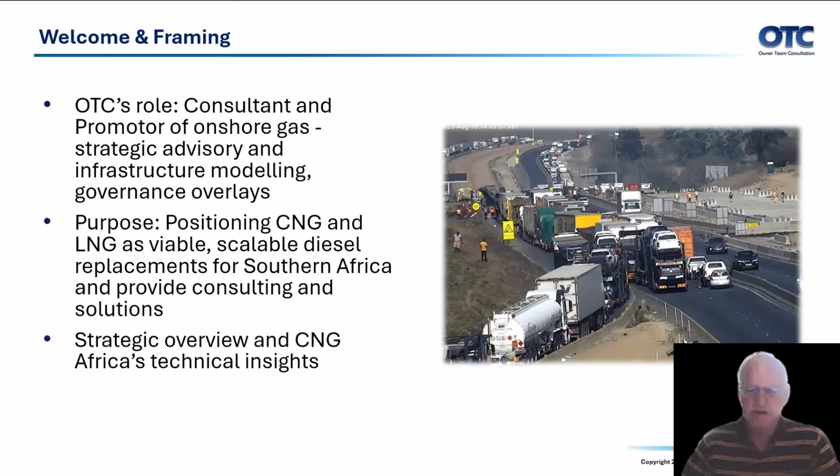South Africa, and I focus here on the South African numbers, but obviously it expands into the total of Southern Africa, consumed 12.5 billion litres in 2024, basically transport, mining, agriculture and backup power.

Maintenance heavy engines and declining resale reduce the fleet return of investment. In South Africa, it's actually very tough to make a profit out of your transporters because of the low margins.

Then it also contributes to pollution. 60% of the diesel is basically liquid fuel mix, and it's increasing. Around 80% of that is imported. You can just imagine what's the impact on the foreign outflows.

And then there's serious issues of volatility, theft, emission risk that makes it very difficult for your consumers of this in your transport, logistic heavy economy. And then your ESG and fuel security pressure demands strategic alternatives also.

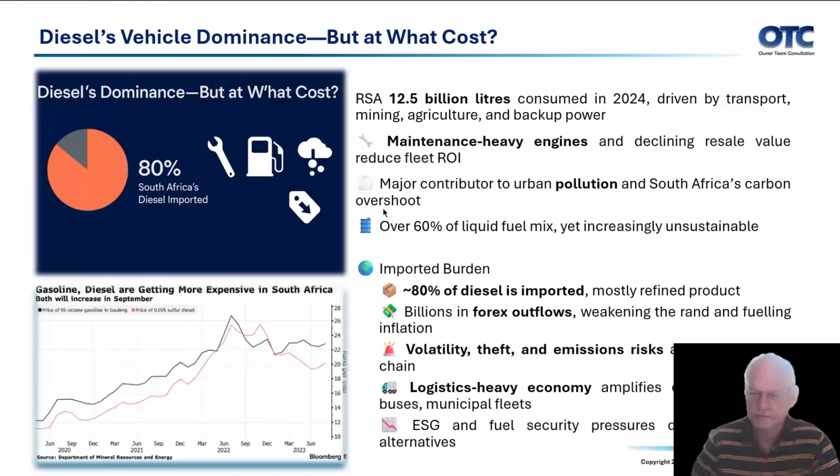What's happening in the global arena versus in South Africa, and there's a definite lag. Global markets are accelerating EV and CNG and LNG adoption, and you see it across the world. South Africa lacks policies, incentives, infrastructure and fleet transition planning.

It all starts with policies, and if we can put the policies in place followed by incentives, that could add a lot. Where we do see traction is in the urban centers that are starting to favor natural gas and electrical taxis and buses, and CNG Africa speakers will get to that, but we will start seeing more fuel stations for gas in these centers.

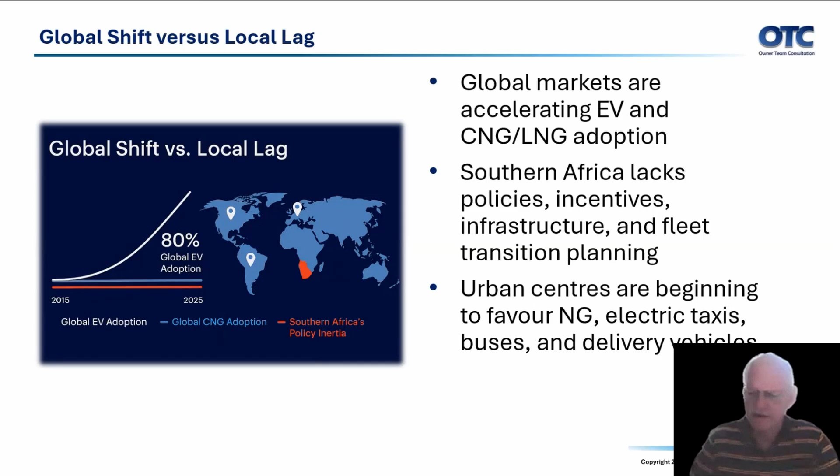What is the alternative? Well, it's basically diesel, and then CNG and LNG, and your EVs. If you look at the slide, you basically see that CNG and LNG is the hotspot or the sweet spot for South Africa. It offers a more balanced, scalable transition for long-distance heavy-duty vehicles, bridging the gap between global ESG pressure and local infrastructure. And it's very scalable.

EV is obviously a long-term solution, and we'll work on that, but it will still take time, and it does have its shortcomings for us at this stage.

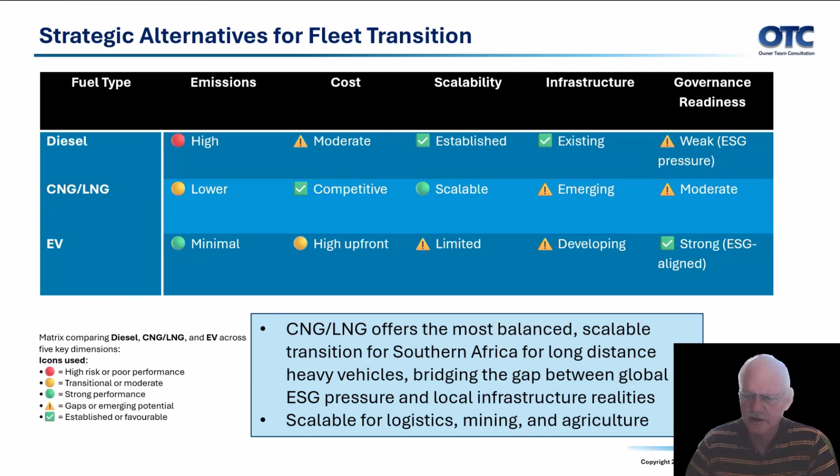The key enablers for onshore gas - and you see I'm focusing on onshore gas, and if you remember our April webinar, we talked a lot about the onshore gas - you can see in the picture on the right-hand side quite a lot of gas fields, and they are available and what's happening to them. But the first key is we're slow in unlocking these CBM or natural gas onshore resources.

But a lot of companies are busy working on that. It's Botala in the Serowe area and also Kalahari Energy. Then Kinetiko in the Amersfoort area, and then Botswana and Zimbabwe CBM and others.

What's important is to accelerate reserve certification and confidence so that you can get your funders to get involved in that. At this stage, these companies are basically startup companies, not having all the finances. So the development funding is key.

But then the modular infrastructure - on top of these areas, you can deploy small-scale LNG plants. And the PolaireTech International that you see a photo on the right-hand side is a very good example of that. We had presentations on that already in this.

When start developing cryogenic corridors, the N3 and maybe the Platinum Belt, the N4 in South Africa, are very good examples. And start converting or putting in place LNG trucks or dual fuel trucks and the refueling backbone, and then get your own OEM support.

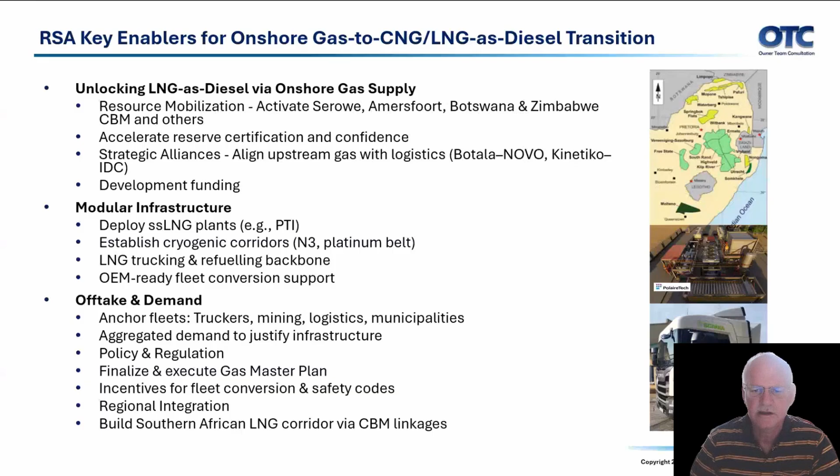You've seen this slide, but I'm just refreshing it. What's important is that the gas is available onshore, and you can see the TCF numbers are quite high, which can support development of CNG and LNG. It's also very well positioned, right on the N3 corridor, in the Botswana area where there are mines and power stations, and in Zimbabwe. So you don't need to move gas too far to convert it to LNG or CNG and start using it.

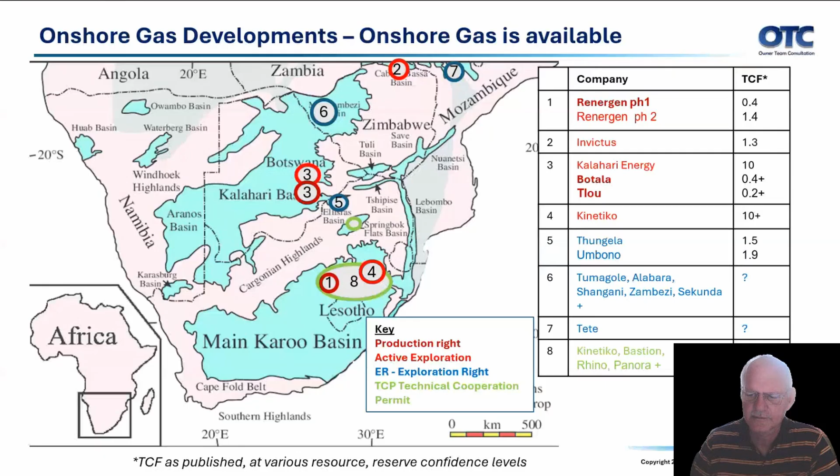Now, what development is happening on these fields? Botala, at this stage, has upgraded their resource already to 454 BCF. Their exploration continues, and they have signed MOUs with off-takers. Interestingly, after I wrote this, there was also a press announcement that MDCB, the government investment arm in Botswana, has also pledged to take up a 50% stake in this to continue the feasibility.

Kinetiko Energy is very active in continuing resource development by drilling more holes and certifying that, and it's attracting investment. Renergen is in the process of a merger with ASP Isotopes, and hopefully that will bring in more finance to really run and start the infrastructure ramp and do better. We all know that Renergen had a very difficult path. Invictus Energy is also busy forming a strategic alliance with Al Mansour Holdings, and they're progressing quite well with their gas expansion. So what we can see from this slide is that the gas is going to be there, it's going to be certified, and it will be ready for investors to put more money into this.

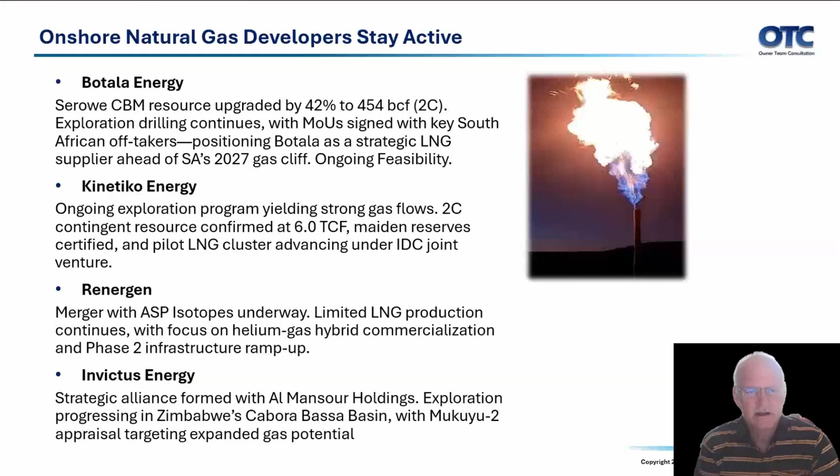What is OTC doing in this ecosystem? We're playing a strategic advisory role that can help with the development. So we assist our clients with development planning, strategic planning, detail work, stakeholder alignment, and looking at the whole business strategy and business model to make that work.

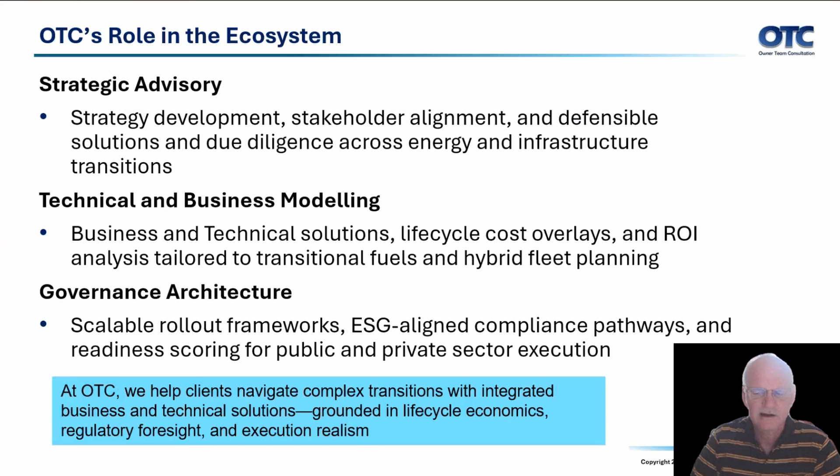We assist with technical and business modeling solutions, and then also scalable rollout frameworks. So we help clients navigate complex transitions with integrated business and technical solutions. This area specifically, because it's in the early phase of its development, that overall strategy look is very important.

Just a case study, and I call it XX Hauler - I didn't want to put the name up. They have a fleet of 33 trucks, running between Gauteng and Durban. If we use a 30% discount of diesel to LNG or CNG, that could be imported or locally developed, and all of that is possible if we looked at all the cost analysis of importing LNG or also producing LNG from onshore.

I think it's more important to look at the orange line in the table. What you can basically see, if I can get to a point of 100% LNG - obviously it's not a conversion of trucks, it's LNG trucks - they can save 14 million rand a year. But even if I just do 40% LNG, which would be a combination of truck conversions, dual fuel trucks, and also full LNG trucks, in all those cases, the return on investment is very, very fast, and they could make 31% to 59% return on investment. That's not bad at all.

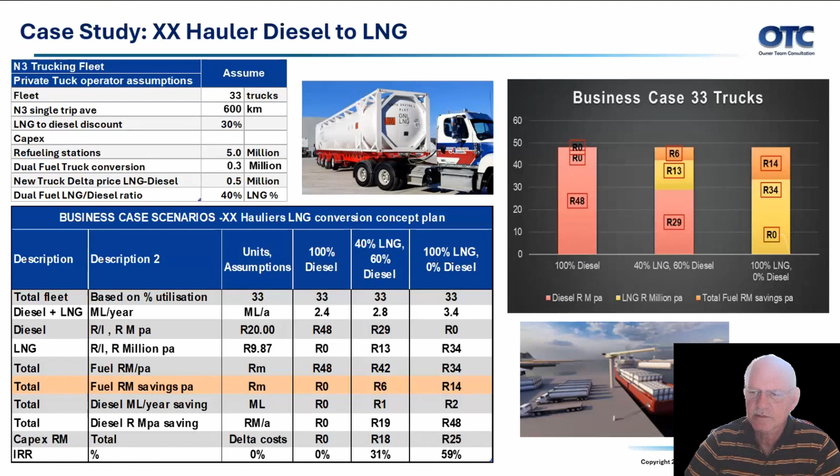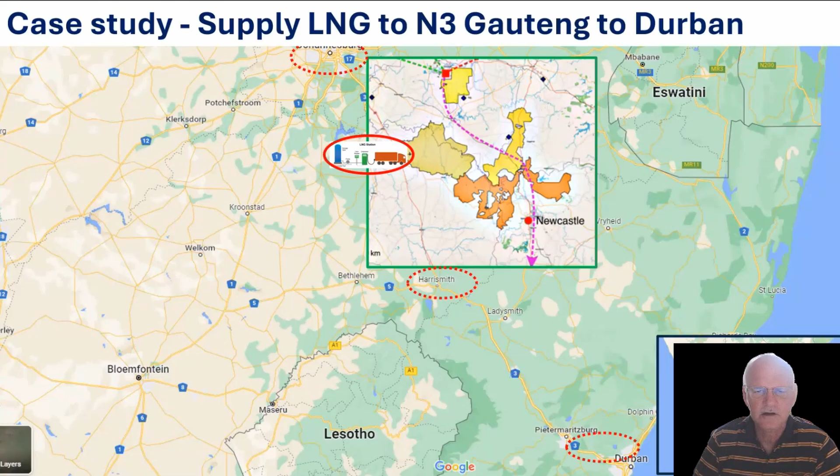So if you look at that business case, its location is on the N3 highway between Johannesburg and Durban. Initially, you put a 60 kiloton LNG terminal, maybe near Villiers. You put dual fuel stations on the route and also LNG fuel stations, and your initial target is 6% diesel, based on that 60%, and then you can grow the trajectory. Currently there are around 13,500 of these transport vehicles on that road per day in one direction.

And N3 is consuming 10% of the diesel of South Africa. The modeling used 22 Rand a litre for diesel with LNG saving of 30%.

Based on the PolaireTech LNG plants and feedstock from Kinetiko, from what we know of the Kinetiko concession, the impact is between 1 and 8 billion per year saving on diesel imports, depending on the scale. At 6% LNG, you already have 1 billion, and if you run up to a 75% replacement, you can have an 8 billion rand total saving.

But what's also more important, you actually reduce the diesel imports. The diesel imports start at 33 billion and end up at 8 billion in that scenario, which has a major impact on South Africa. The return on this is around 25%, with paybacks of 4.5 years and capex of 175 million US.

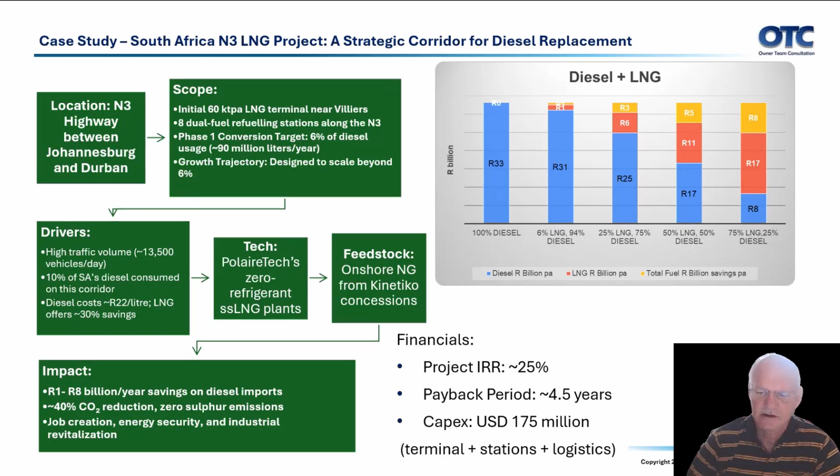Thank you, Koos. We live on the N3, and every time I travel on the N3, I just think, oh, no more trucks, there are loads of trucks on our road. The first time I heard Koos talking about the N3 project, I thought, just don't bring more trucks. But it's not about how many trucks, we already have many trucks.

It's about having these trucks being more environmentally friendly, saving money. I always love it when there's technical solutions that will save money but also give less CO2 into the atmosphere. So what a brilliant case study, thank you for that, Koos. And there's so many things we can still talk around this idea of converting the N3 corridor from diesel to alternatives. Let's look a bit deeper, at more practical things and the impacts on the carbon footprint, operating costs, and so much more.

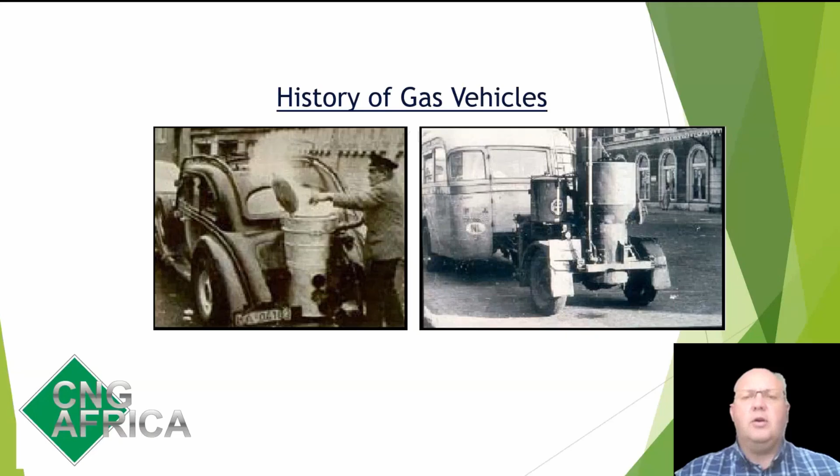And you say, why gas? Is this something new? Maybe it's new for a lot of you in South Africa, but here's some examples of vehicles running on gas during the world wars, where fuel was limited and they had to rely on wood, through a gasification process to actually drive these vehicles, because there was not enough fuel. These were all spark ignition vehicles, so it was quite easy to add another gas product as a fuel, and on this basis it worked perfectly for them going forward.

However, they realized that you couldn't get far with this product in a bag, and the technology progressed to compressing the gas and putting it into cylinders at high pressure, where people are quite scared of high pressures. These all have certain safety devices and things like that. But just to prove to you, these technologies were already on the roads in other countries 80 to 100 years ago, being used, and the technology just advanced, got safer, much more reliable, and also much better.

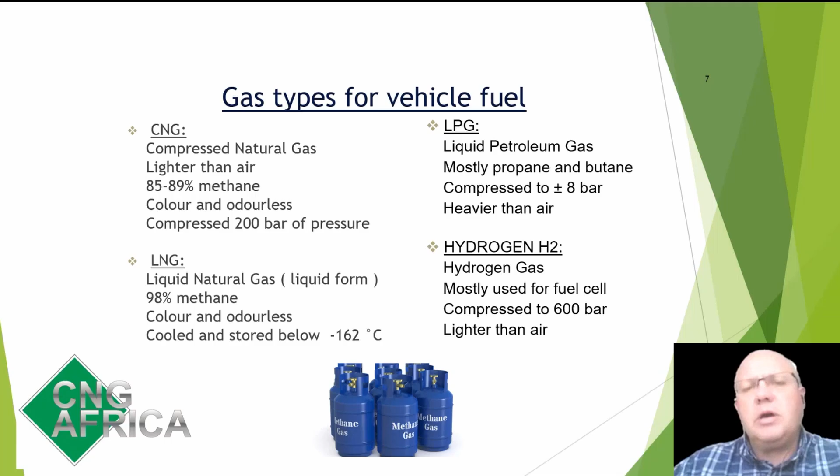As Koos indicated, there are a lot of technologies and options for getting the gas in. In our country, we're not just relying anymore on imports. On the point of safety, I think it's very important to know that there are quite a lot of standards under SABS, or SANS standards as they're known, which we are already using in the country for conversions.

Some of these conversions, as mentioned, were done more than 20 years ago. As the standards get developed in Europe, we're actually adopting a lot of ISO and EC standards. So we follow the international trend of safety, reliability, and making sure that we keep on top of the advancements of technologies in the rest of the world for optimum, reliable, and efficient use of gas as an alternative fuel. So the concerns about insurance and safety and all those types of things are already addressed.

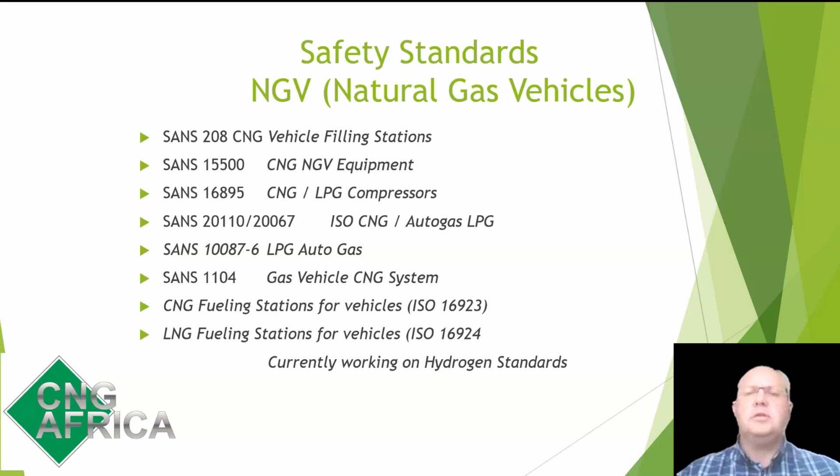Methane, as CH4, is your last hydrocarbon fuel before you go into hydrogen itself. So it's the last and best step you can make to convert all your other hydrocarbon fuels - I'm talking including petrols, paraffins, HFOs, LFOs, propane, butane, all of those fuels. Your last step with your last carbon molecule is methane itself. So we believe this is the ultimate hydrocarbon fuel to be used in the industry for transport.

We know how much emissions is actually caused by fuels in the country, because we're relying quite a lot on our road transport. Our public transport is also very limited, and our railway systems need to be upgraded and implemented again. So we rely quite a lot on fuel in the transport sector, and that's why it's very important that we go to a fuel that's good for the environment, cost saving, reliable, and accepted by a lot of the OEMs - as mentioned, all this development by the OEMs is already done.

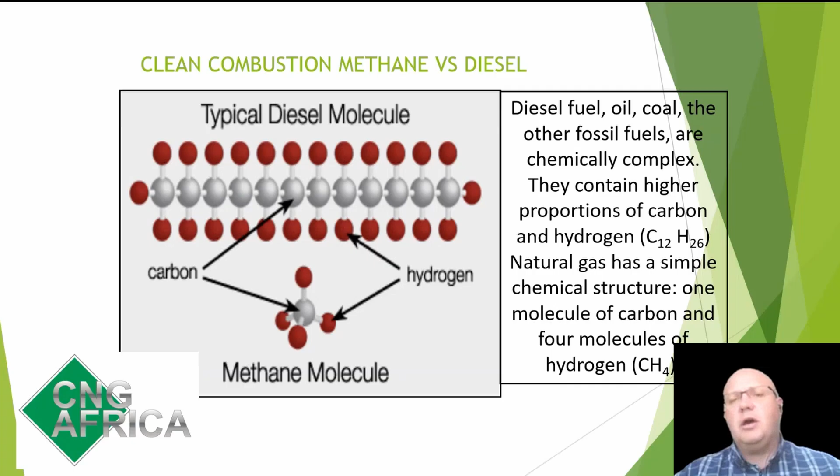But I think what's very important, when you don't have a lot of policies or grants in a country to actually move to a lower carbon fuel and reduce carbon footprint, it's always important to see what's the net effect on your bottom line. At this stage, all the natural gas available in the country is a lot cheaper than the alternative, diesel, and therefore it would be the ideal way of using this fuel within the market as an alternative.

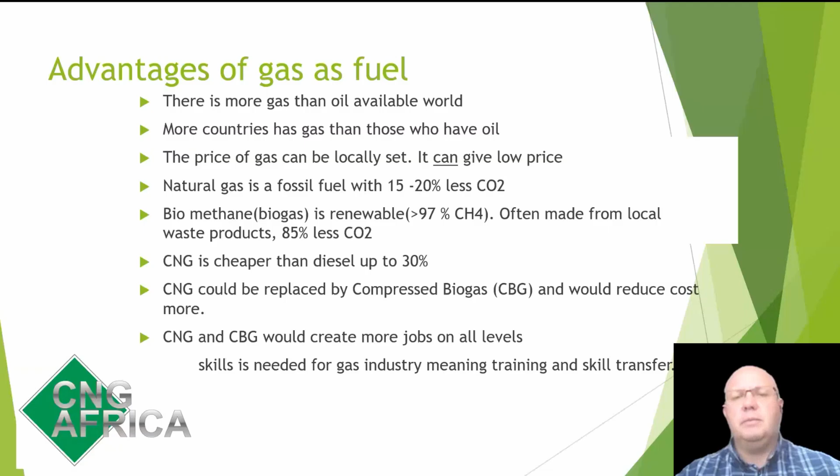If we look at where natural gas is and what's the lifespan of natural gas, you could see the estimate at this stage is there's still about 50 years of oil available in the world, compared to a base case of 250 years of natural gas available.

You can see the countries with high natural gas usage and availability, and what their options are. I believe with all the gas finds within the Southern African region, including our neighbors like Namibia, the supply of natural gas and alternatives in the Southern African region is getting to a point where it's the ideal opportunity to change, and it's also important to become part of the first movers in this process.

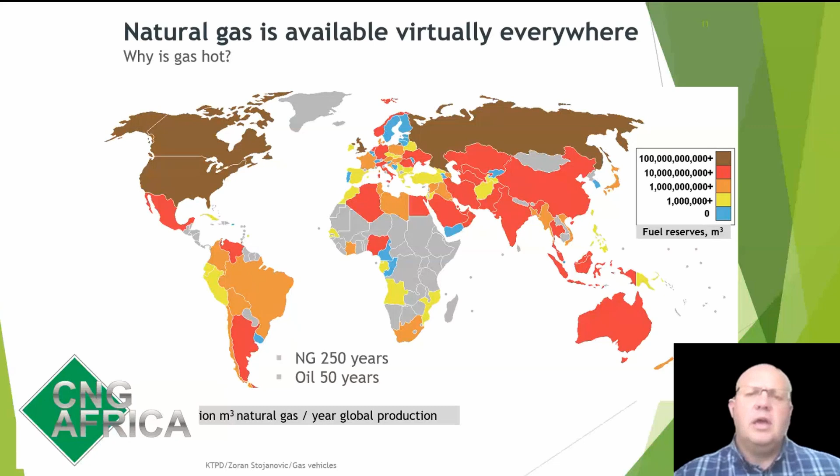A lot of proof of concepts was done already in the country, which you will hear about later. Things were tested under conditions in South Africa, and it's now time that we have to actually start implementing.

If we compare this fuel against a lot of the other fuels, you can see where petrol and diesel sit, why LPG was a good alternative a long time ago, where CNG sits, but also where your ethanol fuels, your E95s and E85s sit - not a popular fuel a few years ago, very popular in South America, but now not so popular anymore - and also where your biogas sits.

So from an emissions point of view, moving to natural gas, CNG, LNG would sit in the same bubble as you see there, but remember wherever that source comes from will also determine the total well-to-wheel carbon footprint. If we look at EVs in our country, we all know where most of our electricity is coming from.

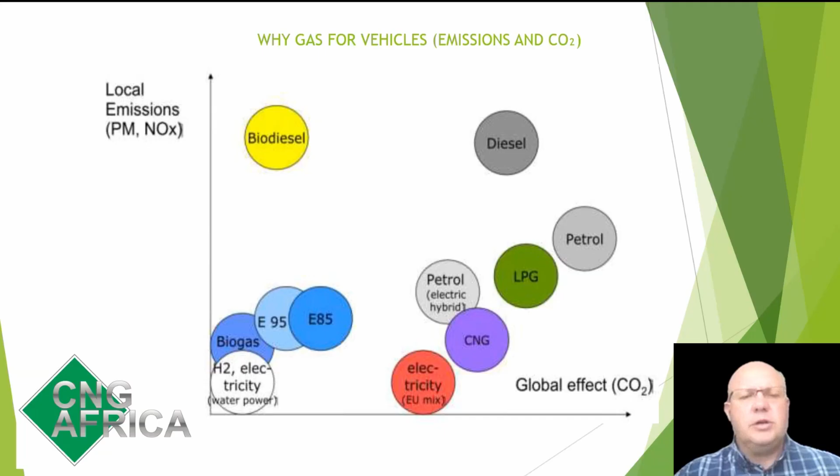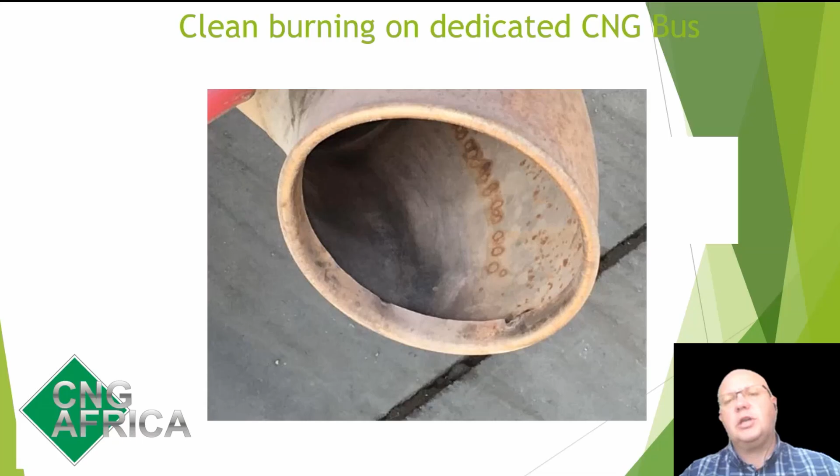It's a coal-based industry, and therefore the complete well-to-wheel scenario for electrical vehicles in our country doesn't look very good at this stage. This is just an example of a dedicated CNG bus exhaust outlet running for a few years. As you can see, minimum carbon compared to any diesel vehicle. The biggest problem here is that these units start rusting because there's nothing actually protecting this emission system.

I'm leaving this technology point based on what James will talk about. There are a lot of different technologies - your bi-fuel conversions, where you move directly from spark ignition petrol vehicles to gas. That's a 100% switch over with the option to switch back. Dual fuel, where you use diesel and gas simultaneously, with a lot of development already done optimizing that, to a stage where some vehicles now run 90% gas, 10% diesel.

Then your monofuels, your dedicated vehicles, including electrical vehicles. Then we've got hybrids - a lot of heavy duty vehicles where there's a gas engine inside actually charging the batteries of the vehicle, or driving a hydraulic unit to drive the vehicle. And what we mustn't forget is also heavy industry vehicles, yellow equipment, and all your fixed or industrial engines can also run on gas - we're talking pumps, generators, forklifts. All those vehicles can also run on CNG.

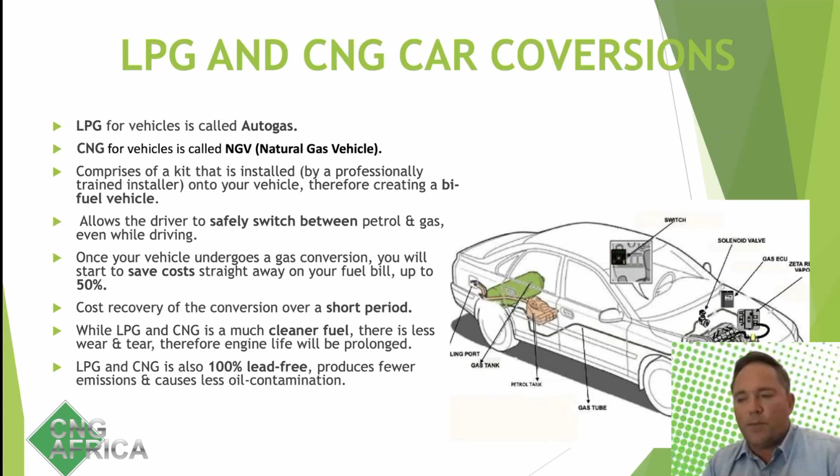If we look at the next slide, some applications for natural gas come in the form of liquid natural gas, which we've touched base on. The characteristics mean you can do more miles with a smaller volume carried around. Those applications are usually for heavy duties, like marine applications, bigger trucks, and trains.

What we introduce now in South Africa is the dual fuel application, where we convert diesel engines to run simultaneously on diesel and natural gas. That gives you the flexibility of longer ranges. If you run out of natural gas, you can still continue on diesel, and when you get to a CNG filling station again, you can fill up.

Our plan in South Africa will be to convert these CNG dual fuel trucks later on to LNG, and there's some equipment changes needed to allow that swap. The last line shows light duty vehicles, which is usually where we do the bi-fuel conversions, like the previous image you saw.

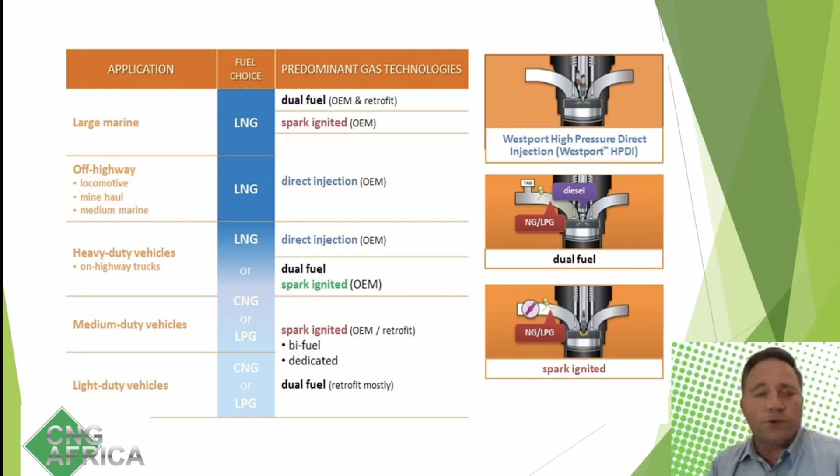Metrobus ordered 150 of these buses running on dual fuel, and they also switch to 100% diesel if they run out of gas. So they have that option as well.

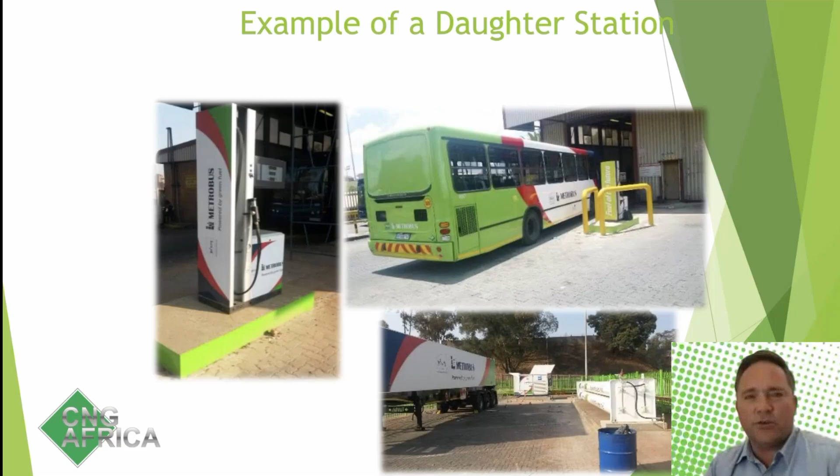The next slide shows the comparison in volume you need to carry around on the vehicle. Unfortunately, compressed natural gas takes up a lot of volume at this stage. You need to compress it up to 200 bar to host enough energy on your vehicle to travel quite a distance.

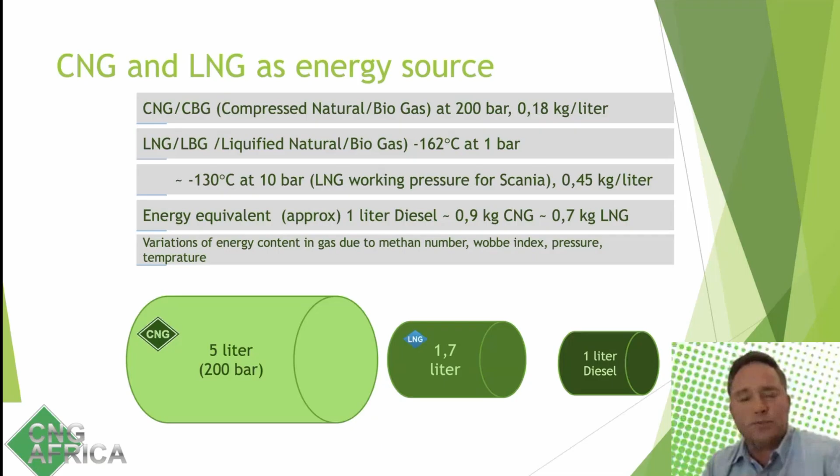There you have the comparison compared to LNG, liquid natural gas, and then your diesel volume as well. So at this stage, compressed natural gas does take up a lot of space and weight on your vehicle, but as the technology progresses, we are moving towards smaller volumes and smaller weight.

The next slide indicates the ruggedness and testing of these CNG cylinders currently being used in South Africa. The OEM manufacturers put these cylinders through various tests - drop tests, fire tests, hand grenade tests - just to make sure you don't have to do those tests yourself in your vehicle.

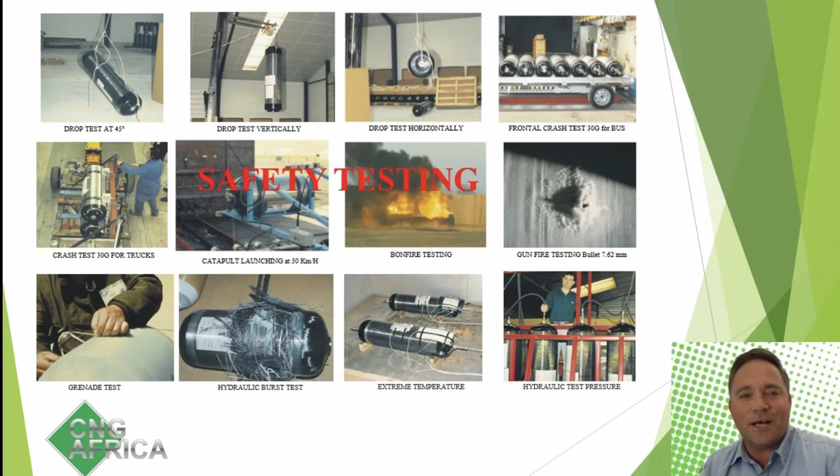So we are proud to say that we've done these conversions also in South Africa, and we've got a couple of these trucks already running around as trials, and we have real good success rates on these conversions.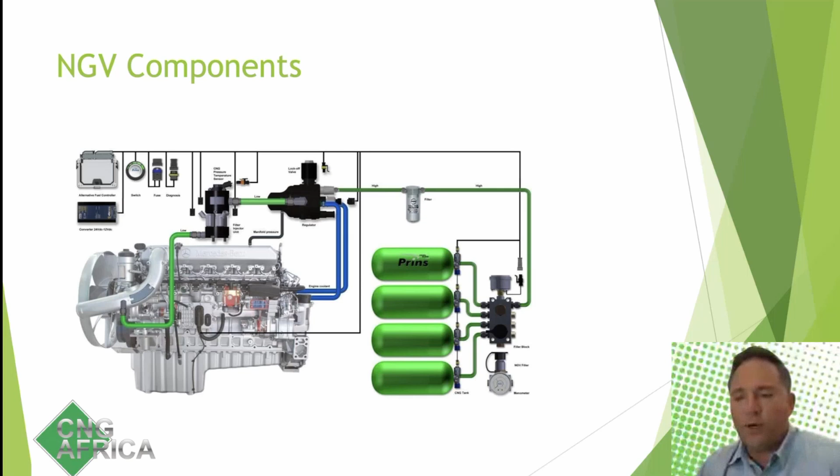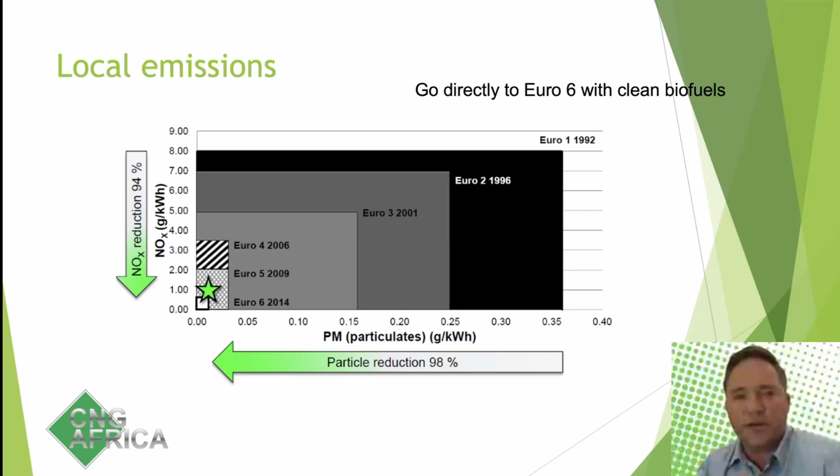If you see the next slide, we'll show you the Euro rating. When you go to natural gas, it will immediately take you to Euro 6 emissions, whereas if you buy a newer truck these days from the OEMs in South Africa, you don't necessarily get all the way down to Euro 6. Our diesel at the moment in South Africa doesn't allow it at every filling station. So if you are into the market of carbon credits, this will immediately help you start saving on your carbon credits. The next slide just shows the flammability limits of natural gas.

It's quite safe, you will need a lot of oxygen. If we go into that graph, it's just to show that it is a safer energy compared to other energies if you put it into the same environment. So we are quite confident, and we are happy to say that we haven't had any major accidents. When vehicles were in accidents with natural gas on board, this equipment was quite safely designed to vent out the gas, and we haven't had any major explosions.

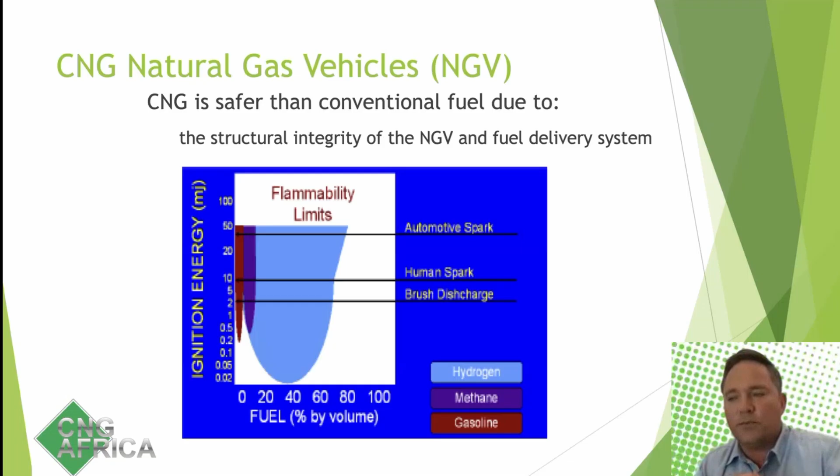So this is just to indicate that it is still a safe energy source to use. Then just a quick principle of how the Dieselblend works. On the next slide, we'll show you the system introduces natural gas into the intake system. It mixes with the diesel, and it ignites as the diesel burns, and that's how it gets ignited. Because your diesel engine doesn't have a spark plug, you still need your diesel to ignite your gas. So yeah, it's quite a simple idea which works very well, from our experience in the market.

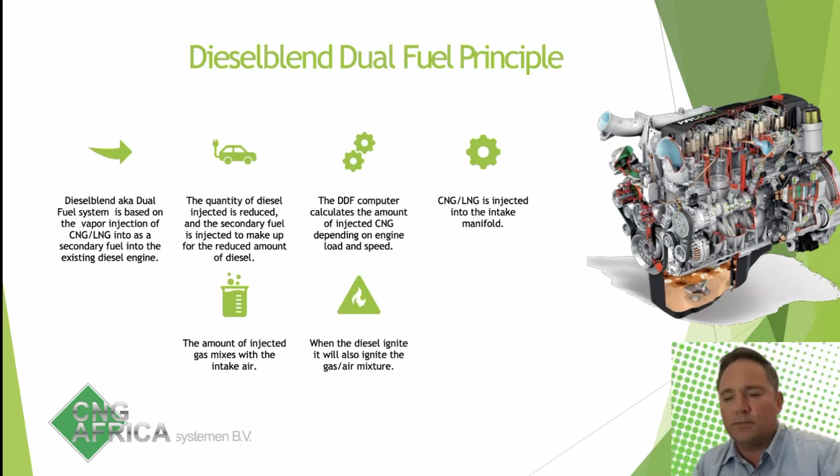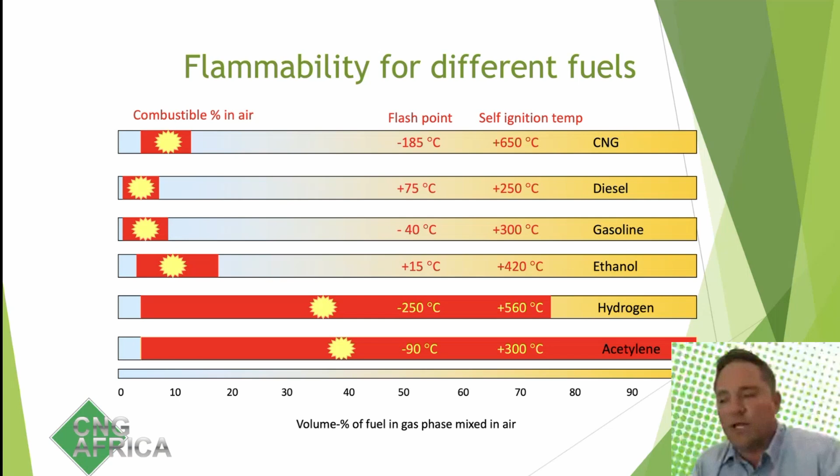And just on the safety slide after that, it will indicate the difference between CNG, diesel, petrol, ethanol, hydrogen, and acetylene, showing how safe natural gas is compared to other fuels. Thank you, James.

I am amazed at the amount of tests that these things are going through, and even the launching test of these cylinders, it's absolutely incredible. Thank you for that, James, and lovely to hear from someone who knows what he's talking about and who has been part of that, and to confidently tell us for so many years it's been tested. One of the questions in my mind would have been, what will happen if a truck goes into a crash? And you've already answered that question without me even asking it.

Lovely, and thank you again to all our speakers for putting a lot of information into this squeeze of time to allow us to have all of that in an hour. We really appreciate it. Some of my colleagues went to see CNG and they looked at a Scania truck that was converted, and I had so much FOMO. I'm not big into vehicles, but I'm big into technology, and I feel left out that I did not have the opportunity to see one of these converted trucks. Maybe one day it will come on my bucket list. But thank you, speakers, for all that wonderful information you shared with us today.